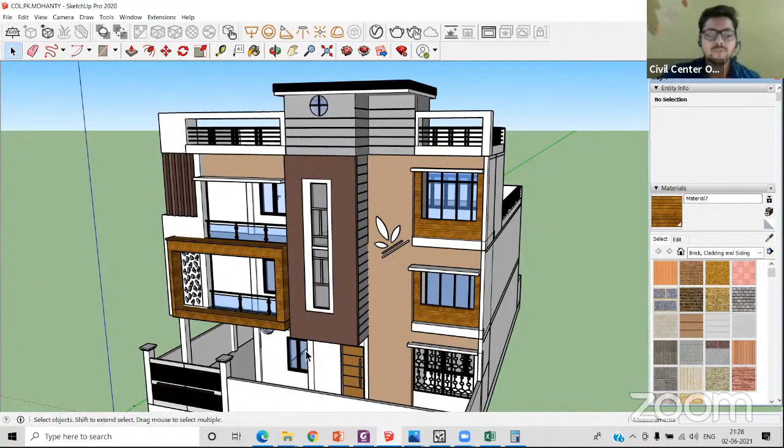फील्ड इन सिविल इंजीनियरिंग, देन आप वो पूछ सकते हैं। उसके बाद मैं आपको दिखाता हूँ कि ये 3D मॉडल।

तो इसके बीच में एक स्टेप होता है रफ स्केच ड्रॉ करने का, तो वो यहाँ पे हम लोग ऑब्वियसली नहीं डिस्कस कर पाएंगे, लेकिन अगर आप प्रोफेशनल ट्रेनिंग लेंगे सिविल सेंटर से तो आपको वो भी सारी चीज़ें बताई जाएंगी।

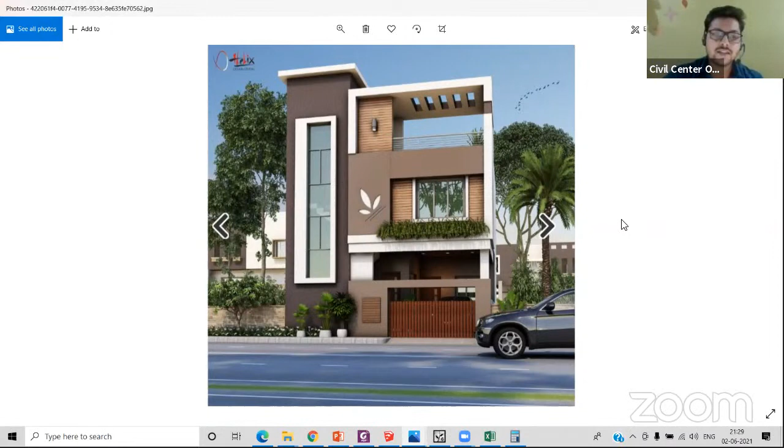जैसे कि इससे रिलेटेड हम लोगों के पास प्लान्स क्या है, उसके बाद हमारे पास जो 3D मॉडल क्रिएट होता है तो वो कैसे क्रिएट होता है, आप कैसे मॉडलिंग करेंगे, क्या क्या शॉर्टकट्स हैं 3D मॉडलिंग के, वो सारी चीज़ें आपको बताई जाएंगी। और अगर आप हमारे प्रोफेशनल क्लासेस को ज्वाइन करना चाहते हैं तो

सो हम लोगों का 3D मॉडल तो ऑलरेडी रेडी है, लेकिन हम लोगों का जो रेंडर करना है वो बाकी है, और वो हम लोग आज के इस लाइव सेशन में सीखने वाले हैं। साथ ही साथ आपको रिकॉर्डेड सेशंस भी मिलेंगे। उस रिकॉर्डेड सेशन में आपके मोर देन 30 प्रोजेक्ट्स जो है वो इंक्लूड किया जाएगा, एंड रिकॉर्डेड सेशन में आपके न्यूमरस वीडियोस रहेंगे।

सो ये एक नेवर एंडिंग प्रोसेस होगा, क्योंकि 30 प्रोजेक्ट्स बनाने के लिए आपको बहुत ज़्यादा एफर्ट लगाने होते हैं। तो जैसा कि हमारे यूट्यूब चैनल पे आप लोगों को ऑलरेडी वीडियोस मिलते रहते हैं, लेकिन हमारे रिकॉर्डेड सेशन में यहाँ क्या होगा कि वहाँ

पे आपको उन वीडियोस से रिलेटेड जो भी डेटा है, जैसे कि आपका आर्किटेक्चरल प्लान हुआ, वो भी आपको दिया जाएगा, या फिर रेफरेंस इमेज हुआ, वो सारी चीज़ें भी दिया जाएगा। साथ ही साथ आपको एक व्हाट्सएप ग्रुप में ऐड किया जाएगा, और उस व्हाट्सएप ग्रुप में आपका कोई भी सवाल होगा वो आप वहाँ पे पूछ सकते हैं, और आपको सपोर्ट प्रोवाइड किया जाएगा। ओके, सो ये था एक ब्रीफ डिस्कशन हमारे कोर्स के बारे में।

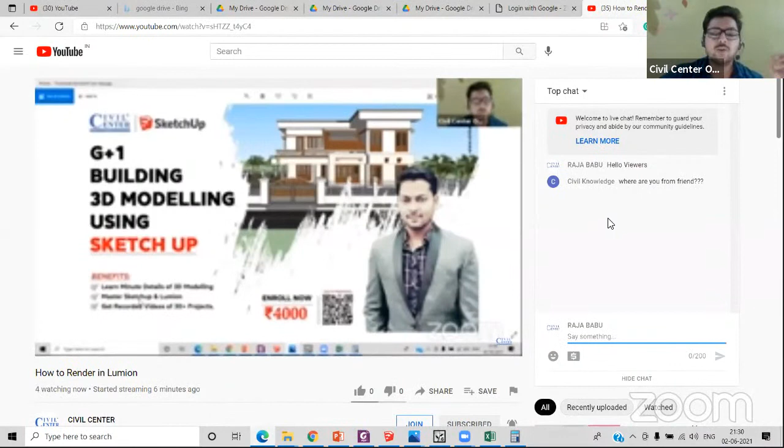Okay, we are located in Bhubaneswar, and if someone is willing to find us, then you can simply just Google about Civil Center, okay, and over there you can simply find our address. So have to just look for Civil Center over here, and you will see that we have our address over here. Okay, so you can also use the Google location and everything, so you are smart enough to do that. आप बस सिविल सेंटर को सर्च कीजिए एंड आपको हमारे बारे में हमारा लोकेशन भी मिल जाएगा। ओके, सो इट इज लोकेटेड इन भुवनेश्वर। आई गेस आई हैव आंसर्ड यू।

नेक्स्ट जो है, मैं आपके चैट सेक्शन को ओपन रखता हूँ। आपको कोई भी क्वेश्चन पूछना होगा तो आप यहाँ पे इजीली वो क्वेश्चन पूछ सकते हैं। अब हम लोग आते हैं कि हम लोग रेंडर करेंगे कैसे।

तो हम लोगों का लूमियन ऑलरेडी यहाँ पे मैंने इंपोर्ट कर लिया है अपने मॉडल को। ये इंपोर्ट करने का प्रोसेस जो है वो काफ़ी लंबा होता है, इसलिए मैंने उसे इसमें इंक्लूड नहीं किया है, बट मैंने इस मॉडल को इंपोर्ट करने का जो प्रोसेस था उसे ऑलरेडी रिकॉर्ड कर लिया था। सो आपको मैं एक ग्लिम्स दे देता हूँ कि कैसे इसे इंपोर्ट करते हैं।

For that I need to just open up a folder over here. Let's go to the desired folder, and from there you can see how you can import this whole model over here.

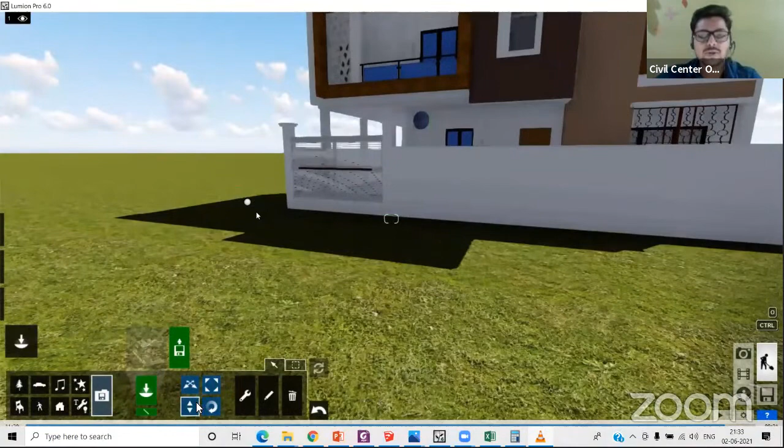Now let's move to the rendering portion. Okay, so do you recruit civil engineers for your firm?

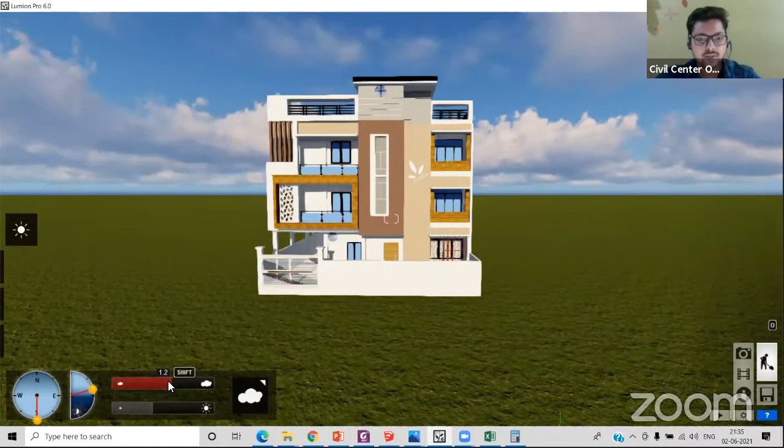So over here you can see the clouds are set now. I have chosen a clear sky. Let's keep the clouds this much for now, and after that we can also change it.

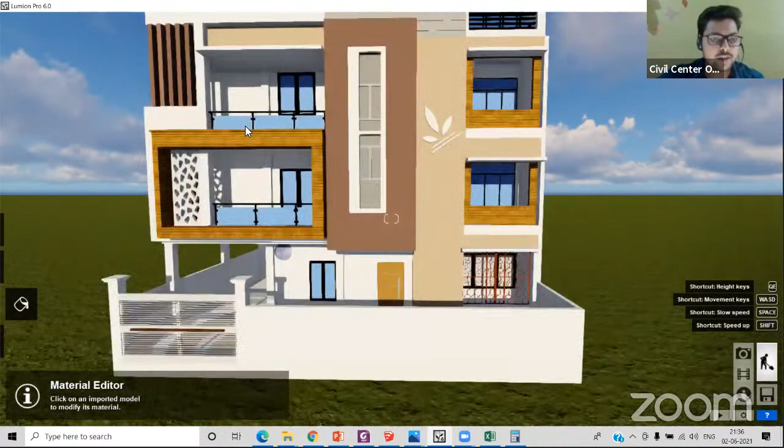Now I'm going to provide the materials to this model. Whenever you choose any color, you will see that all the portions of the same color have been highlighted, and from there you can reduce the reflectivity and the gloss and everything, or you can simply choose the color from where you have saved it. I have all the colors saved over here, so I'm just going to pick the color from here, reduce reflectivity and other things, and then click on save.

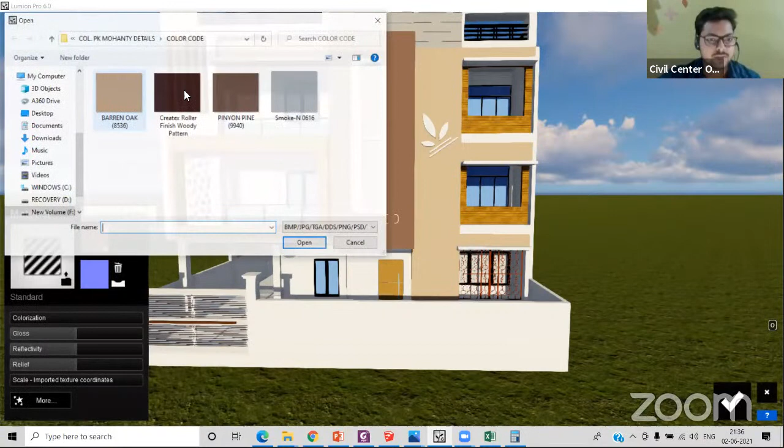So over here you can see I have missed this particular pillar, so I'm just going to make it same as all the others by providing it with the same color. Now it's time to provide the color to this one.

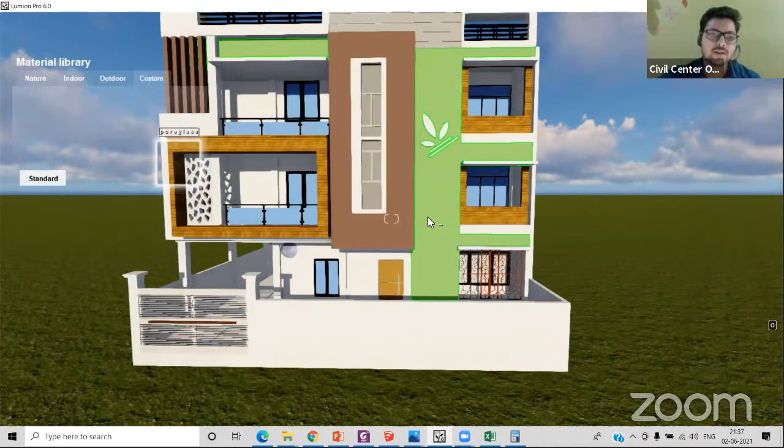So again I can pick the color from my codes over here, and then I can simply reduce the gloss, reflectivity and relief. For that you can either drag it, or you can simply click over here at the 0 position, and you can see this is now looking decent.

Now we have to provide the texture at these places, that is around the borders of the window. For this extension I have a different texture roller, so I'm just going to place this one. Now I'm going to get rid of the reflectivity and the relief, and zoom in a little bit to this portion so that I can have a better view of it.

Now I'm going to set the scale. Working with color is very easy, but working with texture is a little bit tricky, so I will have to keep on increasing the scale till I find the perfect scale over here. Okay, I guess I'm close.

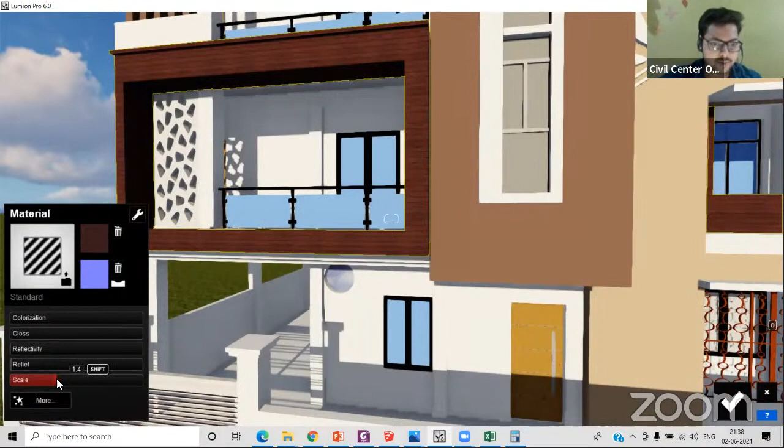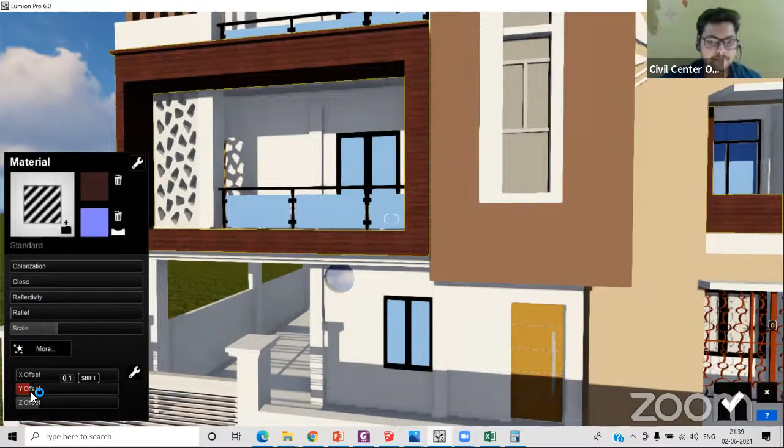Over here you can use the position. Now you can just start with X offset. Let's do the Y offset. Yeah, now it's placed perfectly over here.

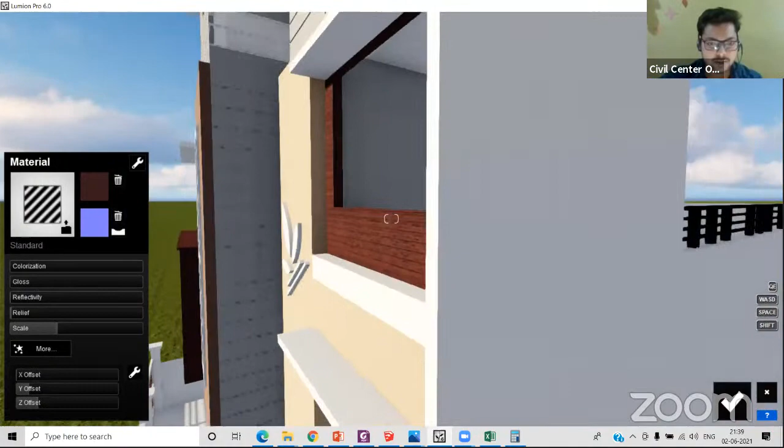So I'm just going to check the other locations too. Okay, so we can see it has been placed end to end at this portion. And now let's observe for this portion. So it is not perfect at this portion. So we can just try with the Y offset and try to place it perfectly.

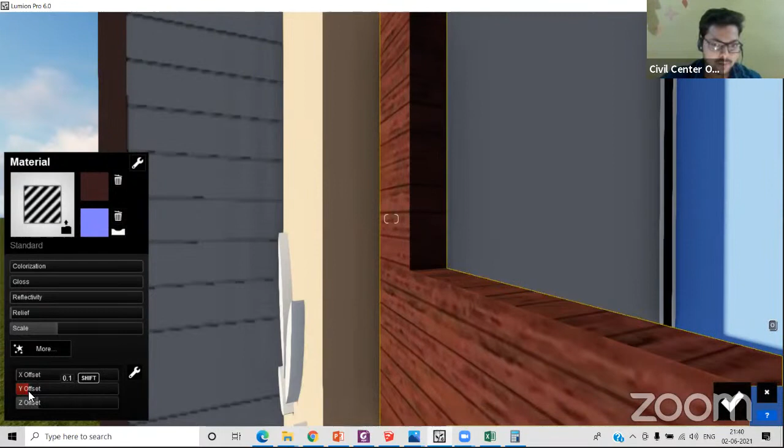Yeah, now it's placed perfectly. So let's check it for the other windows also. So see, all you have to do is to take care of the perfection in your model. Okay, rest everything is fine over here. Now for the movement, I'm using the arrow keys and the right button on my mouse.

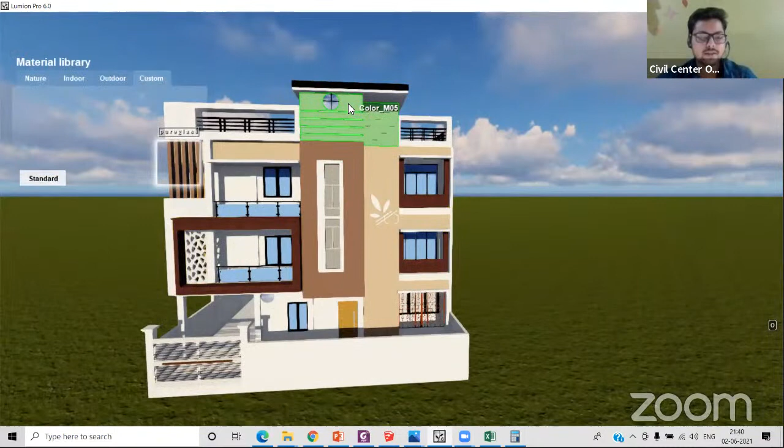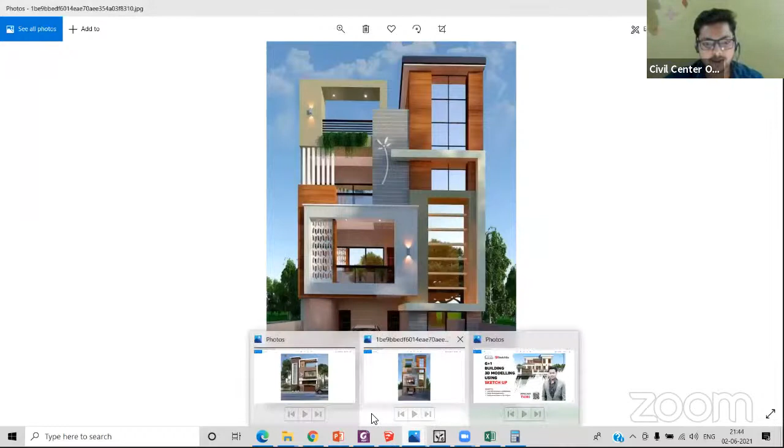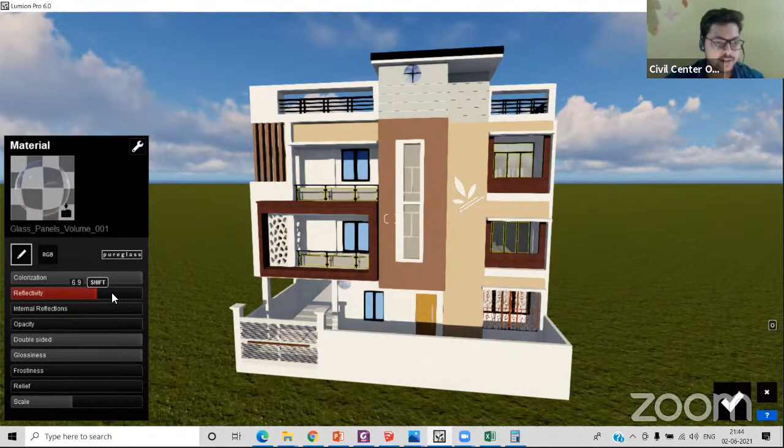Now for the reflectivity, you can just go for changing the values. Wherever you find the reflectivity to its best, you can keep that. Let's keep the reflectivity around this one. If you want to increase the internal reflection, then you can also do that.

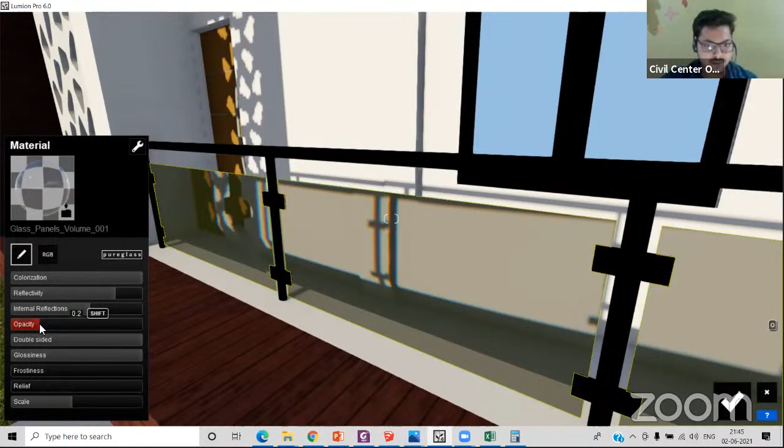Opacity can be provided a little bit over here. Now let's look at it from a little far distance.

Okay, it is changing the glasses over here in the windows too. So we are going to just use this. Let's use the glass in the window.

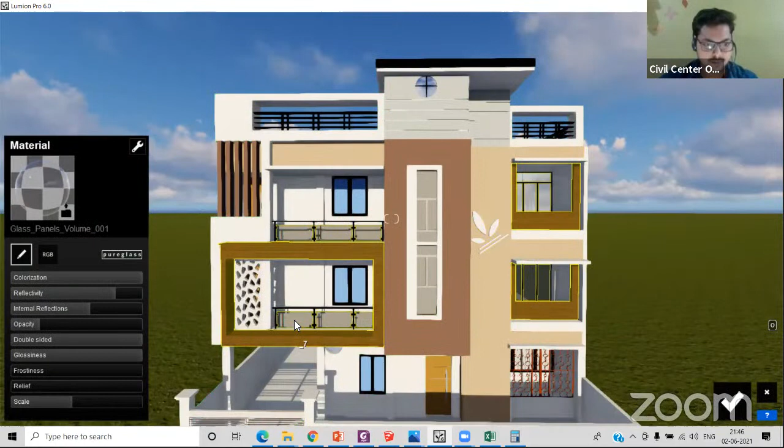Let's try to keep this at 12.5 with internal reflection 0.4. Save it. Do the same for the other glasses.

Outdoor. Then pick the glass. This one.

In the outdoor, we are working with the second glass, and over here in the outdoor we are working with the second glass. Let's see what has been changed.

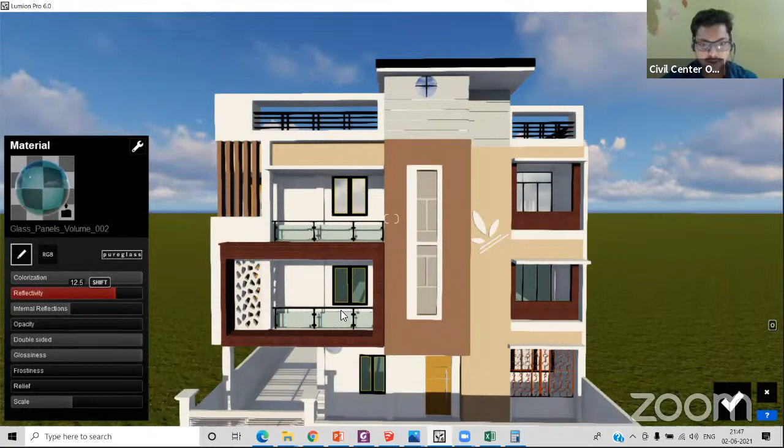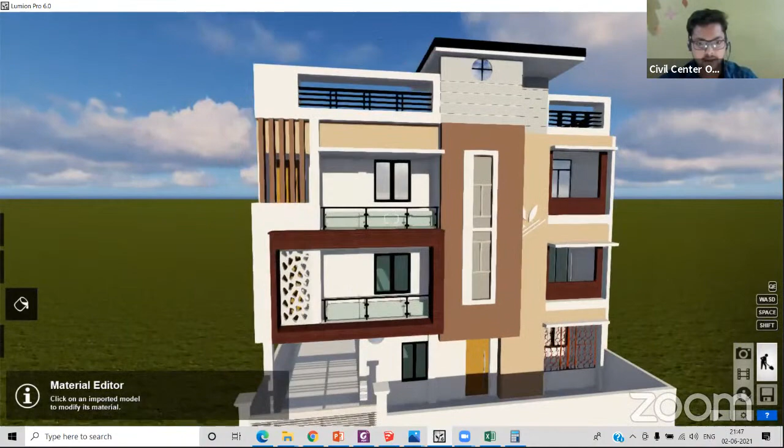I guess the thing that has been changed is the intensity of the sunlight and the height of the sun, but we will try to make it similar.

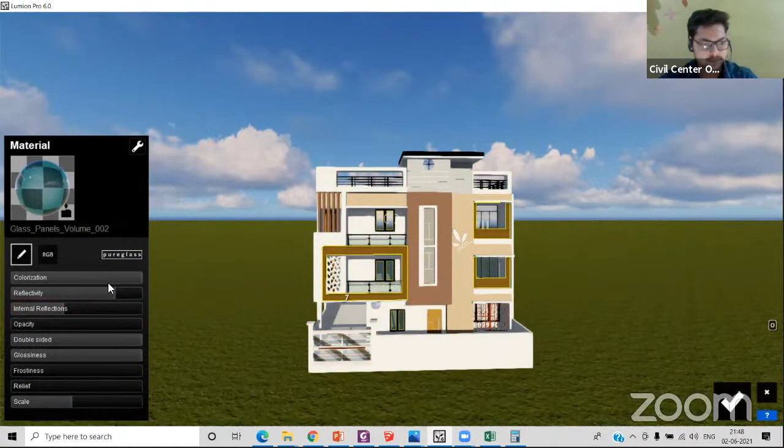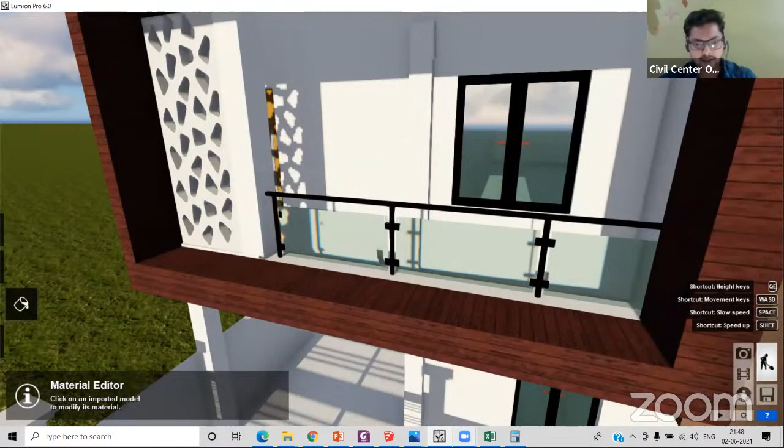Okay, now it's time to work on the handrails. Let's take the reference from the reference image itself.

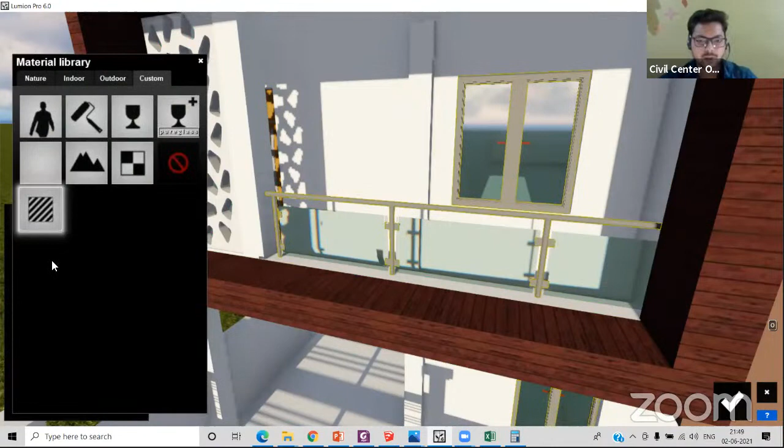Or we can again work with the texture itself, or we can simply increase the colorization also. I guess this much black is enough.

You can see how these glasses are reflecting the sunlight.

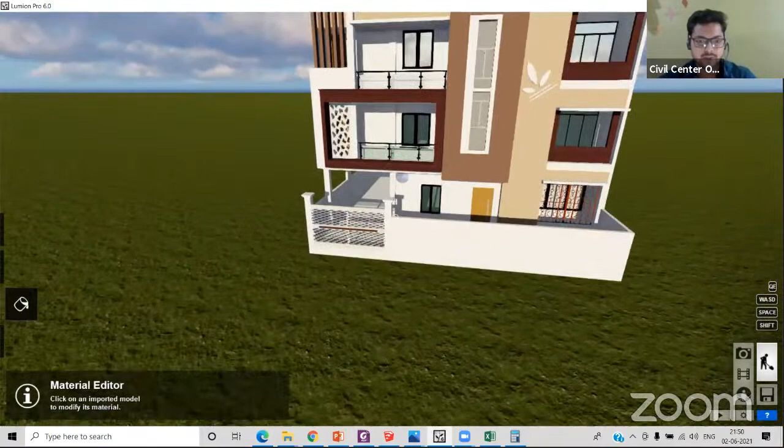Okay, so all the bars have been selected, the glasses have been selected. Now it's time to work on this one, that is our door.

Let's check if anything else is being selected over here or not. Okay, no, it's just the door.

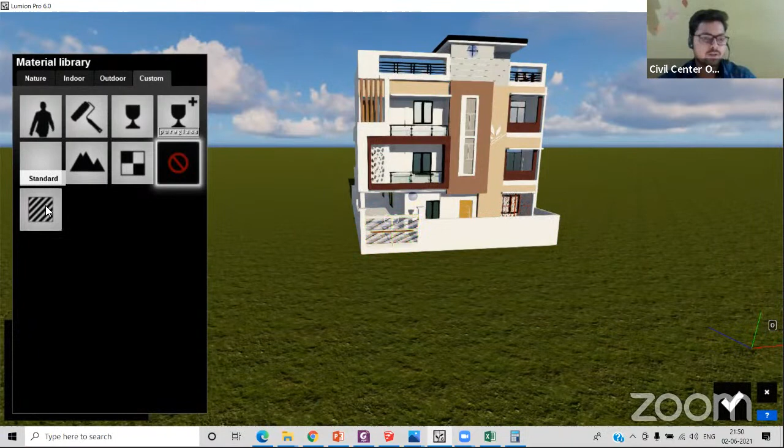So I'm just going to provide a little bit of the metallic texture to this one. For that, I'm just going to go for aluminum, and from there, I'm just going for metal. Let's choose this one.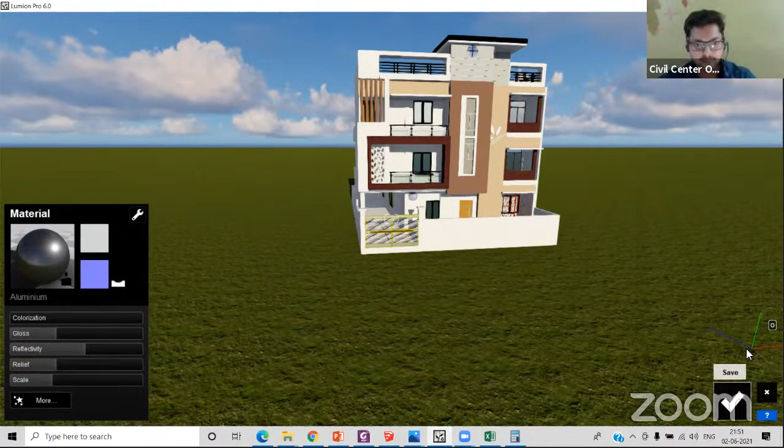Play a little bit with the gloss, reflectivity and relief. Zoom in to check. Okay, I'm good with this texture.

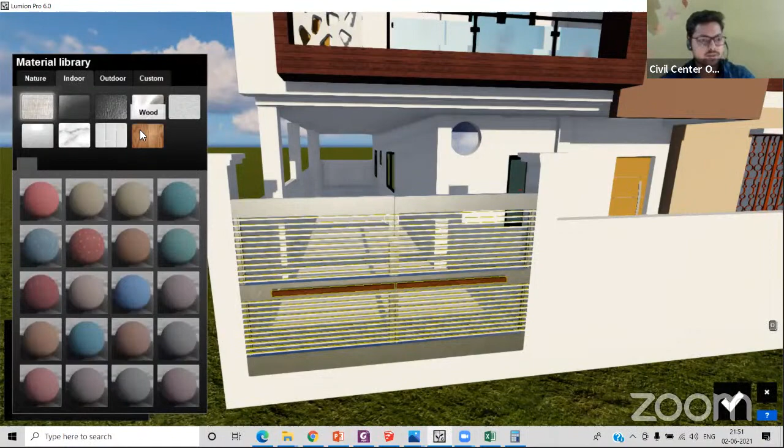Now over here I can find the texture of the wood, so I'm just going to provide it with the texture of the wood also, or let's try with the metal first. Let's try to provide this one.

Let's zoom a little bit. Yeah. Let's increase the colorization.

Let's make it a little darker.

So we will have to place the color like this. I'm just going to find out the perfect texture for this one.

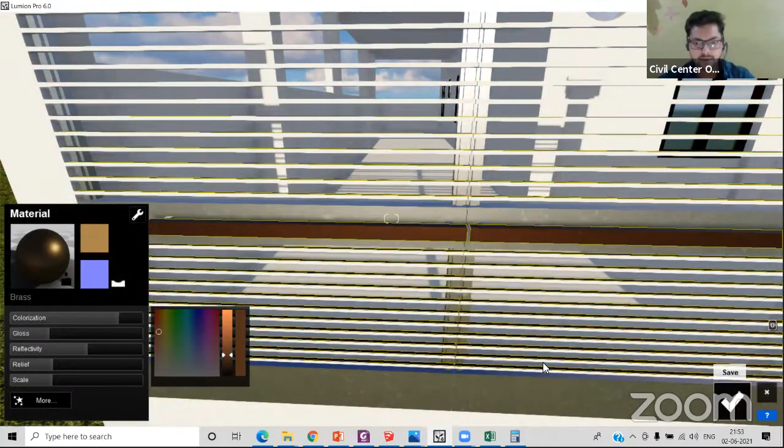I guess this much of it is good. Now let's have a look from a far distance.

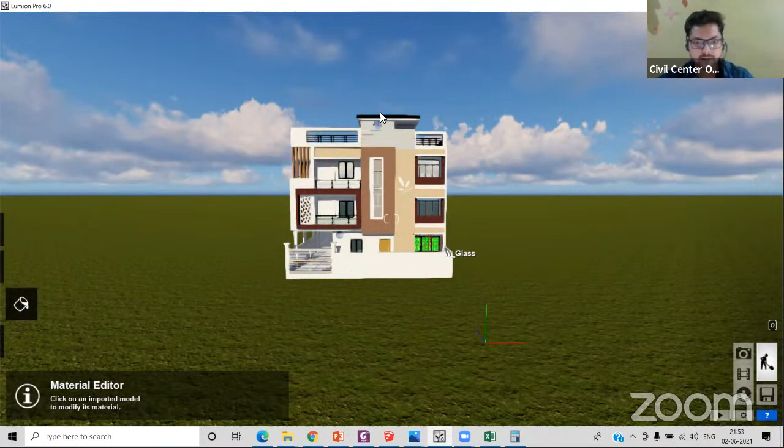Now we are left with, I guess, just one thing. I guess two things: one is this glass and another one is this. And then I guess we're also left with that material. So let's do the change for this glass too.

Okay, Gaurav, we will do that.

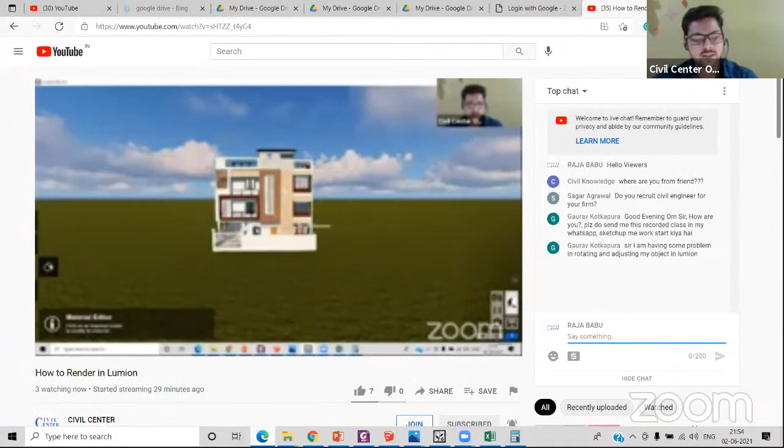Okay, now let's just start changing the metal in this window. So for that we are going to have a little bit of the metallic texture.

So we are left with two more glasses and this metallic texture over here. Let's deal with this one first.

Let's go to the outdoor. Over here look for metal. Then you can have different metallic textures over here.

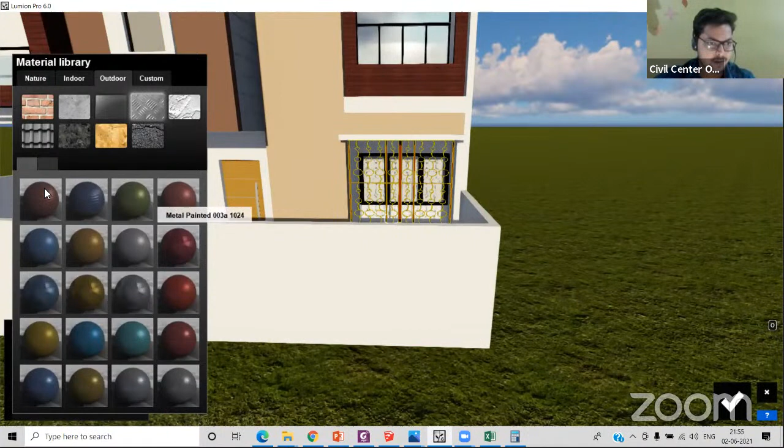And we want a little bit of color like this. So let's zoom in over here. Let's decrease the gloss.

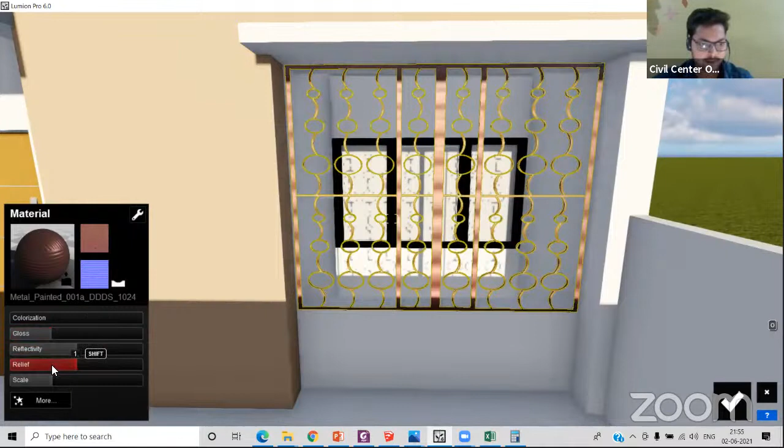Let's try another texture. Yeah, it is better than the previous one. Okay, no.

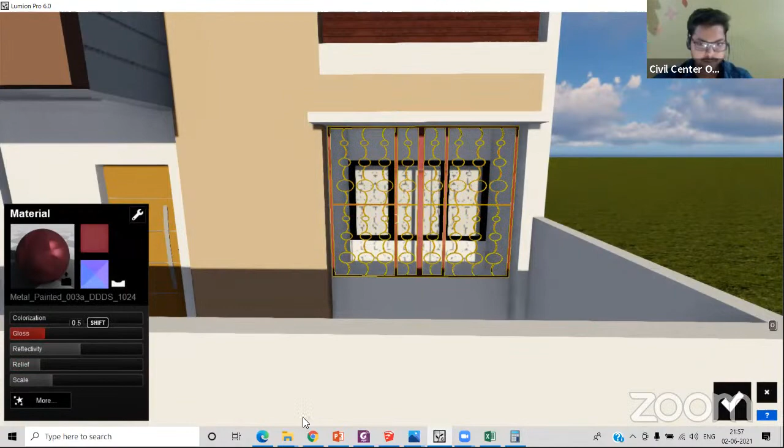Okay, so now you can see it is already giving a decent view to our model. So now what we are going to do is change the glasses over here, taking the help of the reference image.

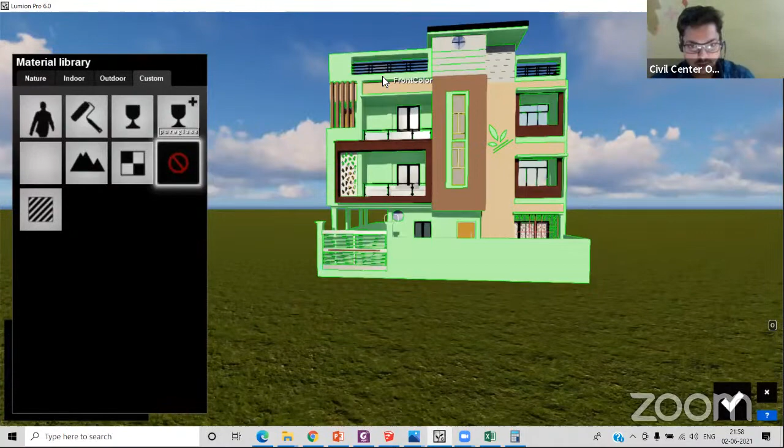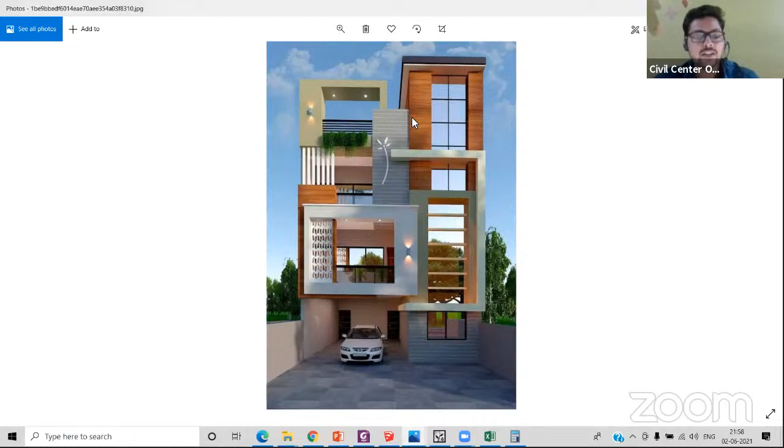Now we have to change this glass, so let's first take a reference of what kind of glass we need here. I think we need a bluish shade glass like in this reference image, and the second reference image also has a little bit of that bluish shade. This bluish shade appears this blue because of the reflection of the sky, but here you can see this bluish shade is like the natural shade of that glass. So we are going to work with that one.

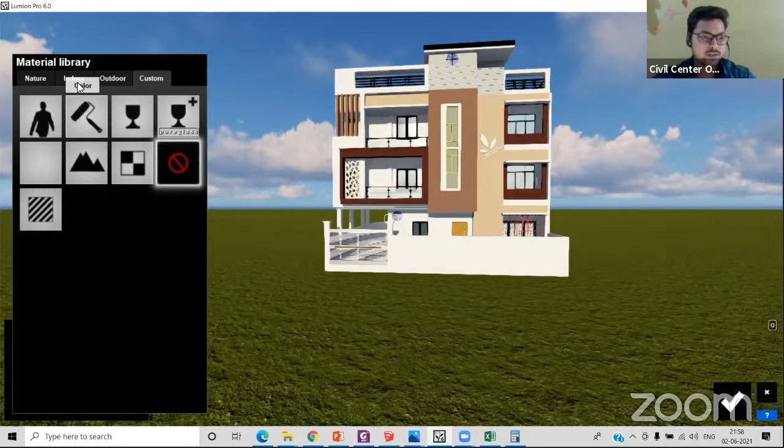Now we have to just work with the glass. I'm just going to select the glass, go to indoor. Over here I can look for the glass, then I'm going to try a bluish shade. Let's see, yeah, I have this blue glass over here where I can increase the reflectivity, opacity, and everything is already high.

So let's get closer to the glass and let's see how it's appearing. Let's try to bring it to this color. For that, I can just go to RGB, and let's increase the reflectivity a little bit, bring down the colorization, reduce the internal reflection, opacity, double-sidedness, glossiness is too much over here.

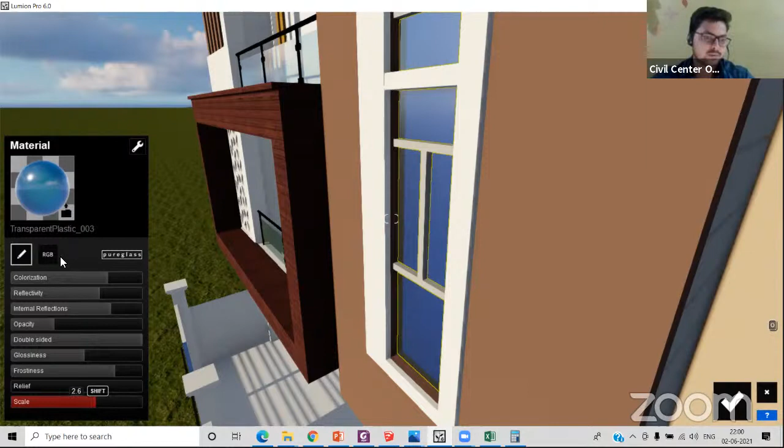Frostiness can also be reduced. Scale will not affect this much. Now let's click on save and let's see it from a distance.

Let's change the height of the sun. Intensity of sunlight can also be reduced over here in order to get a better view. And then we are going to change this glass.

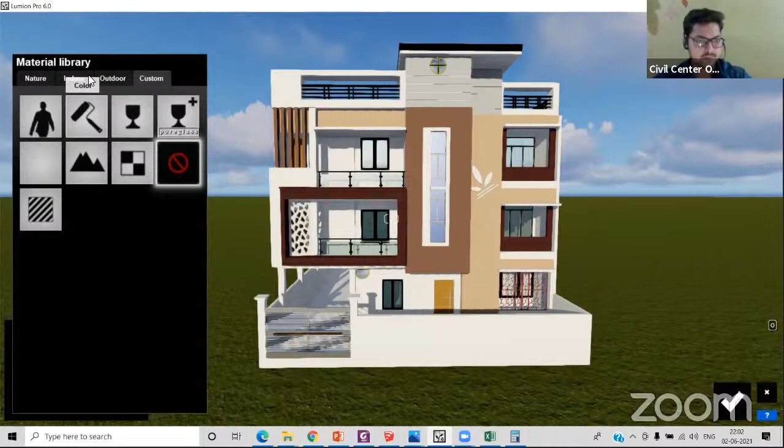So this glass is mostly working as a skylight, so we are going to keep it like that. Go to indoor, then glass, and then we are going to have the same glass as the previous one with a little bit of modifications.

Let's try this one. Colorization 0.7, reflectivity 0.6, 0.8.

इस तरीके से हम लोग यहाँ पे चेक कर सकते हैं, जैसे कि ये 0.7 है, ये 0.6 है। तो हम लोग सेम पैरामीटर्स को अचीव करने के लिए यहाँ पे चेंजेस कर सकते हैं। So we can just take the reference from here. Okay. 0.3, and then 0.3, 0.5.

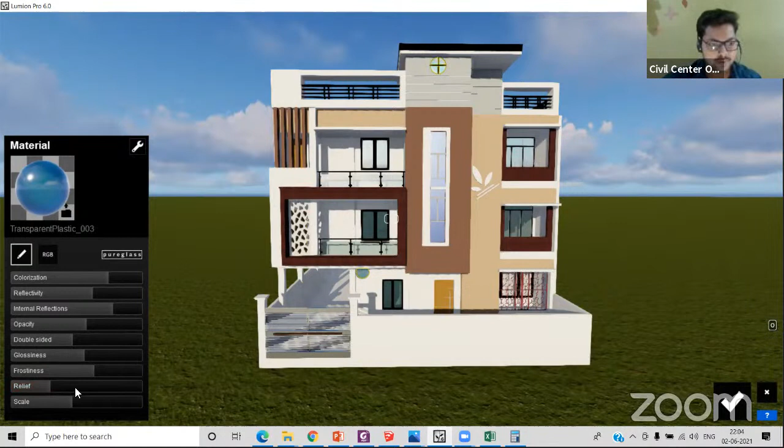Let's reduce the frostiness too. For now, let's save it.

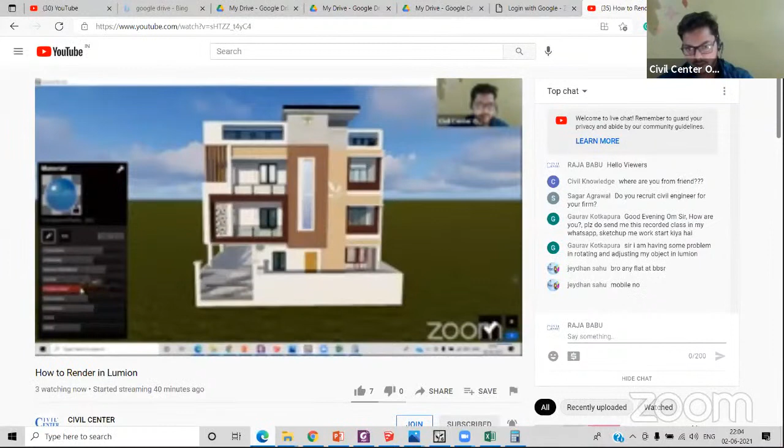Now it's time to take out the render of this one, and let's see what kind of image we are getting. So that will be the step where we are going to just check the things.

Okay, so let's go to photo, and from here you can just set a view first. Try to keep things in the middle, that is your object. Try to keep this one straight, from both the vertical and the horizontal point of view. Horizontal is good, and now it's time for the vertical one.

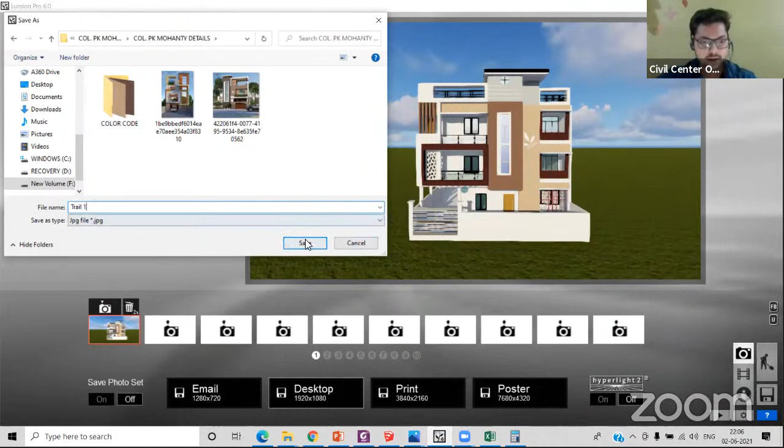Now let's take out the render. So we will just start with a small resolution. Let's name it trial 1, and save this one so that we can check out whether we are moving in the right direction or not. Obviously the final render will take some time, like it may take 2 to 3 hours over here, but for now this will just suffice our need.

Let's see what we have got, so this is our trial 1. This is the render that we are getting in our Lumion. We need to set the views over here, so that is the one thing that we are noticing.

Then the glasses need to be worked out yet, because this glass is in the shadow so it is not getting very much exposure, and these glasses are looking a little different. So we can keep the plantation in front of the building so that it can get a better view. Also, the colors are good here, and the grooves are properly visible, so that's not an issue. If I just set the view in the right direction, then it will just start working.

Here we have used the metallic texture, so it is also giving a good appearance over here.

If we go for the high quality render, it will make it look a lot better than this. So guys, I think you have already learned the basics of how to work in Lumion. Now you just have to practice. All the things I've used in this project, I have to be a little precise with the specifications, like how to set the glasses and how to set the view. We'll learn that in some other training program.

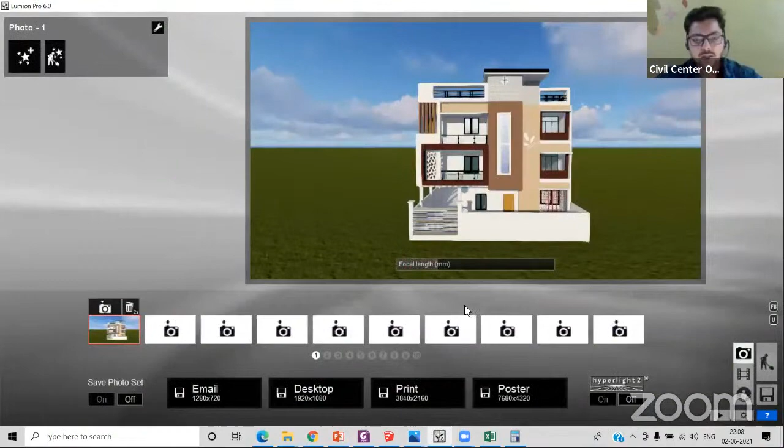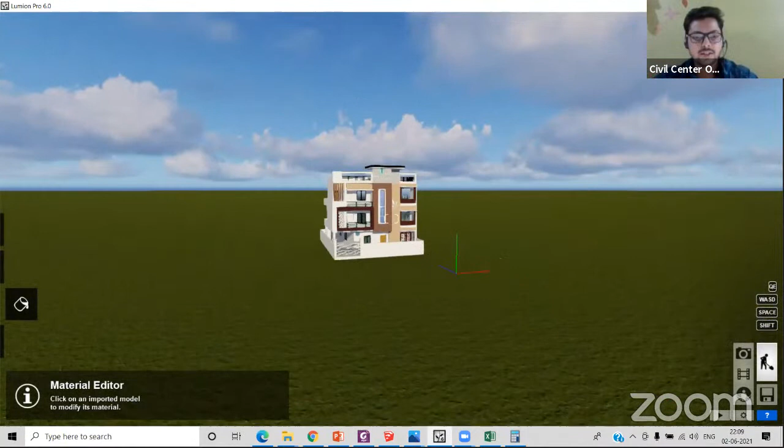Question: Sir, how can we rotate the screen in Lumion? Okay, Gaurav, this is for you. Let's go to build, and over here I'm using my mouse scroll button. If you want to rotate it like this, if you want a little displacement on the screen, or want to set it in a better way, you'll have to use the right mouse button. Then you have 4 keys on your keyboard: A, W, S and D, which you can also use to rotate. So for precise rotation, you'll have to use the keys A, S, D and W on your keyboard along with the right mouse button.

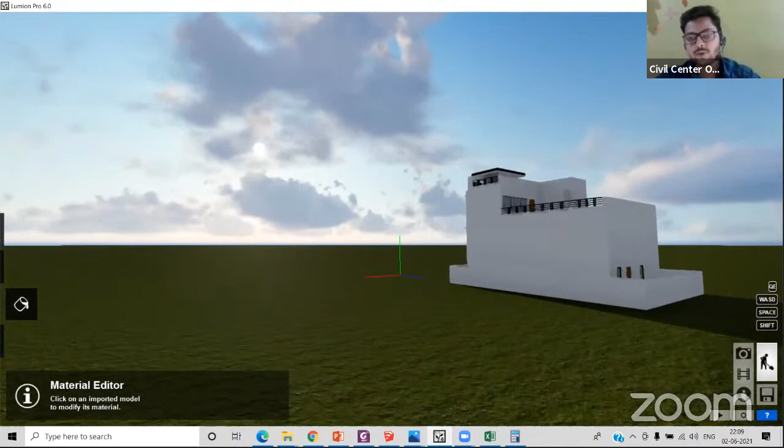This is how you can simply rotate over the screen. So to have precise rotation, you'll have to go with that. And if you want to zoom in or zoom out, the scroll button is used for that. However, if you keep the scroll button pressed, you'll again have the feasibility of rotating the model. So that is also done using the scroll button. So there are basically 3 things you can use.

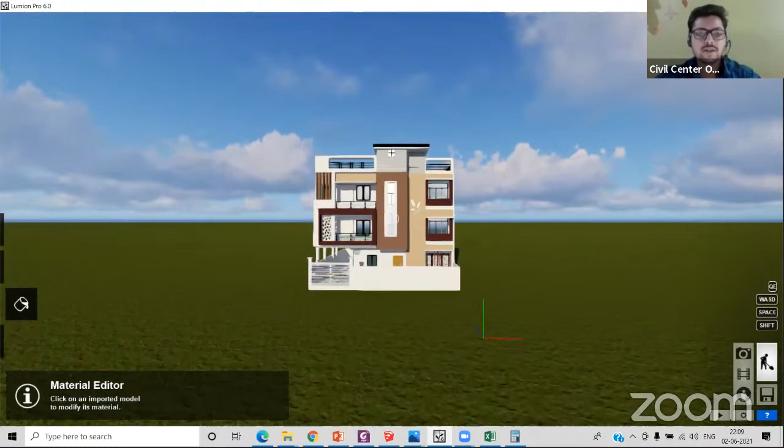First, the scroll button of your mouse. Second, the right button of your mouse. And third, the four keys on your keyboard, that is A, S, W and D. So these are the three tricks of rotating your model in Lumion, but you will need a lot of practice in order to do it. So that is a different thing.

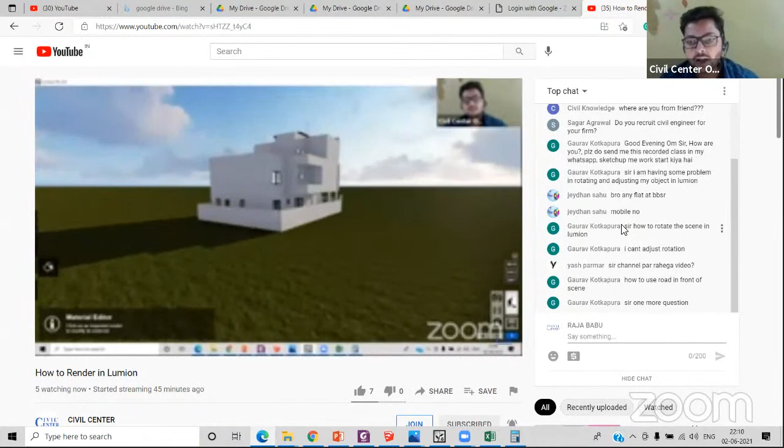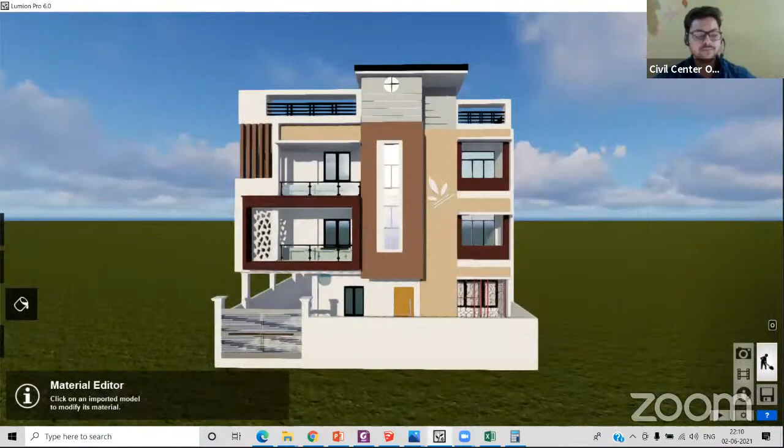If you want to use the road in the front of the scene, you can either use the landscapes in Lumion, but that will be a little tricky. So it's better to just model the same in SketchUp. It's not modeled over here in SketchUp, so you can simply model it in SketchUp and then change the material in Lumion.

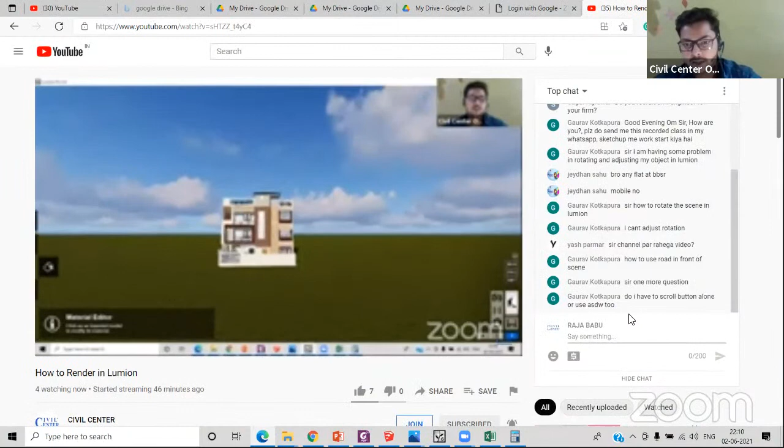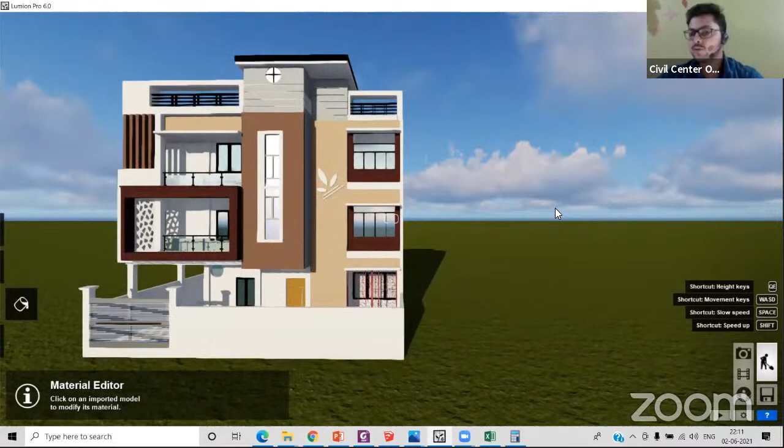Question: Do I have to use the scroll button alone for ASWD? No, you don't have to use anything alone. If you're using the scroll button, that will work a little differently. If you press the scroll button and move it to the left, it means you're standing at a position and looking to the left of the window. If you drag your scroll button to the right, your position is the same, you're just turning your head to the right. If you slide it to the left, that means you're at a particular height, standing in front of the building, but looking to your left. So to look left, slide it to the left, and to look right, slide it to the right. That's how it works.

And this symbol you can see is the symbol of the camera. Let me put it in the color area. Over here you can see this is the symbol of the camera. You'll have to work on this one. You can use this to look above or below. You can also keep it at any particular height and rotate your head in order to understand this better.

Let me show one more thing. If you use ASWD on your keyboard, it will help you move like this. So you'll have to go with the combinations. Try to always go with the combinations. Don't go with a single thing.

Okay, next, I need to orbit the whole scene. So you can see I have already used the orbit tool. I used the right mouse button and then the A, S, W keys on the keyboard.